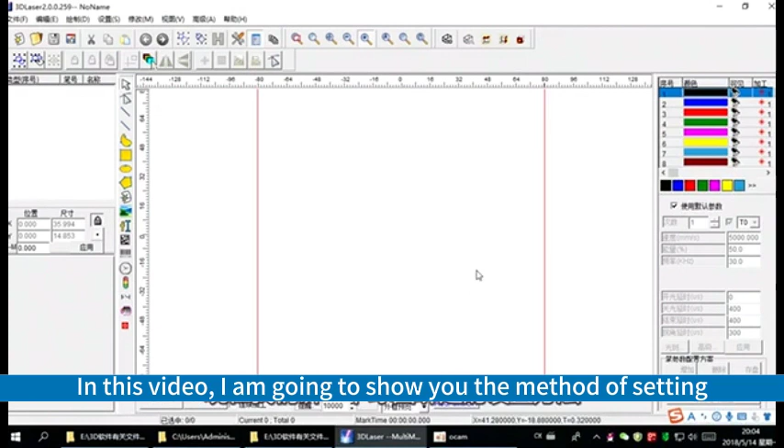In this video, I am going to show you the method of setting up a spherical binding. Draw an object to be bound. For example, let's draw some text.

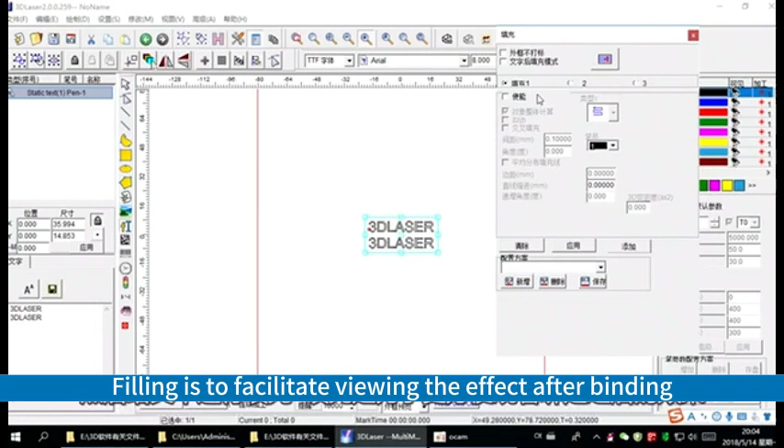Click the center button to center the text, then fill it. Filling is to facilitate viewing the effect after binding. Choose a fill, click Enable, and then Apply. The text has been filled.

What's next? Enter the three-dimensional interface to do some settings. We can see that the text is still not bound, it is still a flat image.

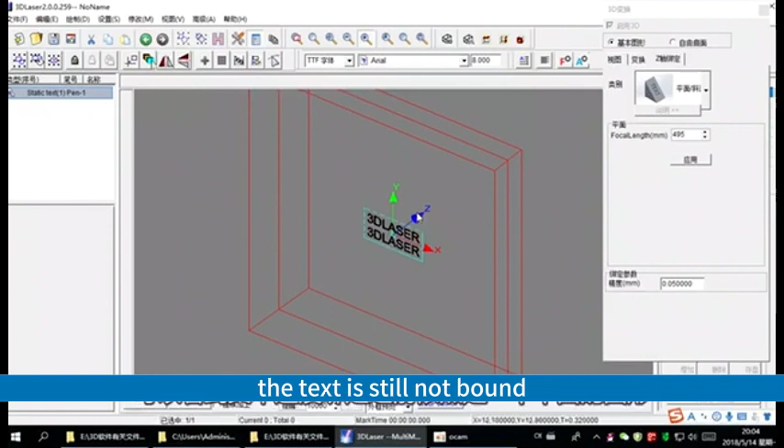In the basic shapes, under the Z-axis binding category, we choose the sphere. Set these two parameters.

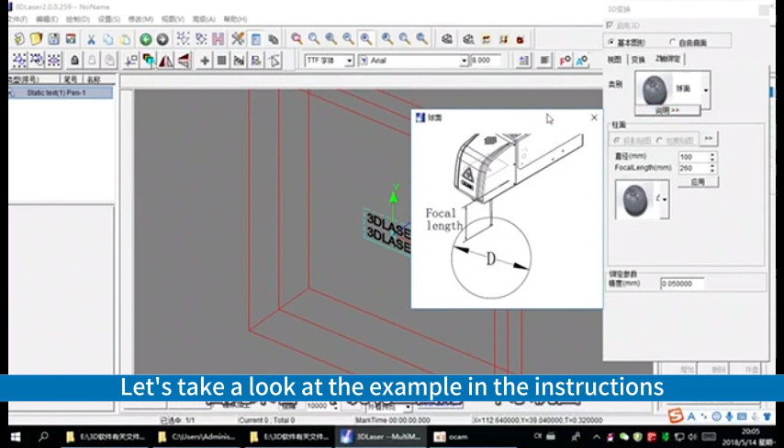Let's take a look at the example in the instructions. There is a simple explanation of how to set these two parameters. The diameter refers to the maximum diameter of the sphere, so we fill in the diameter of the sphere here. Assume the diameter of the sphere is 40.

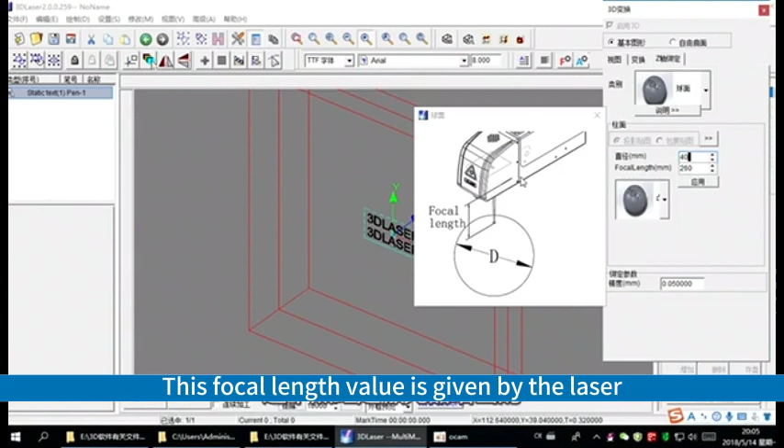Focal length refers to the focal length. It is the intersection of the laser to the surface of the sphere. This focal length value is given by the laser. Assume the focal length of the laser is 280, so we fill in 280.

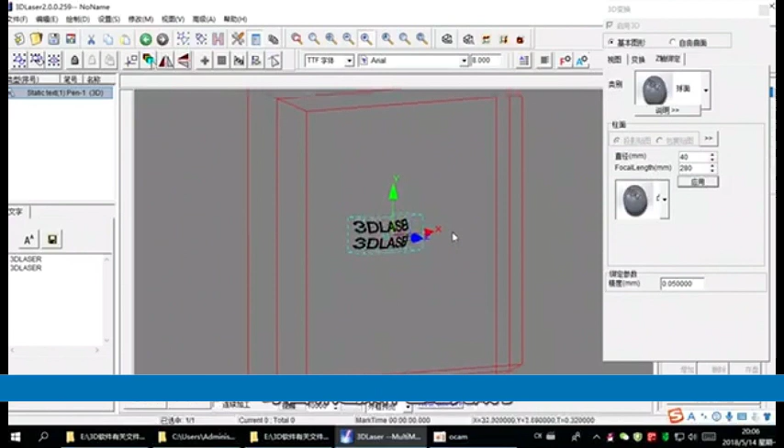And apply. Now we can see the effect. The spherical binding operation is completed.

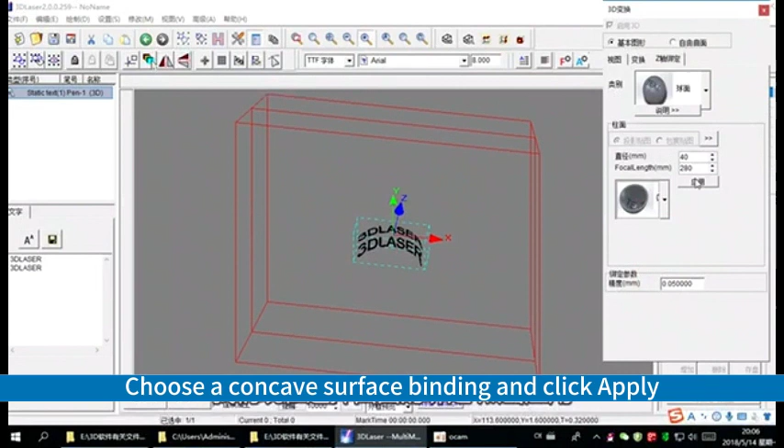Now, let me show you the difference between binding on a convex and a concave surface. We have found a convex surface binding. Choose a concave surface binding and click Apply. Alright, let's see the effect of the concave surface binding.